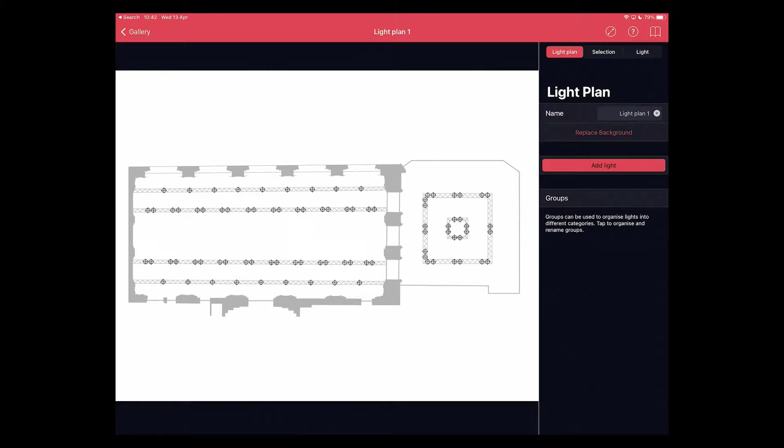Now I'm going to place that by zooming in with a pinch to zoom feature on the iPad, and then I'm going to tap on that number 1 fitting and I'm going to drag it over the location of that fitting.

Perfect. Next I'm going to add another light. I click on Add Light, and now I just want to make sure that the code is the same. Currently it's LTYWRY8J, and if I were to look on the RCL handheld controller, we'll see it's the same.

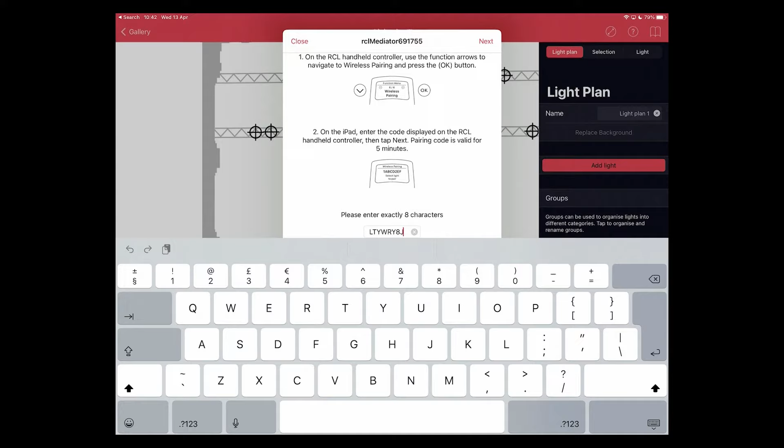So I can take this handheld remote in my hand, click Next on the iPad, walk over to the second light fitting, and then select it whilst it's flashing blue.

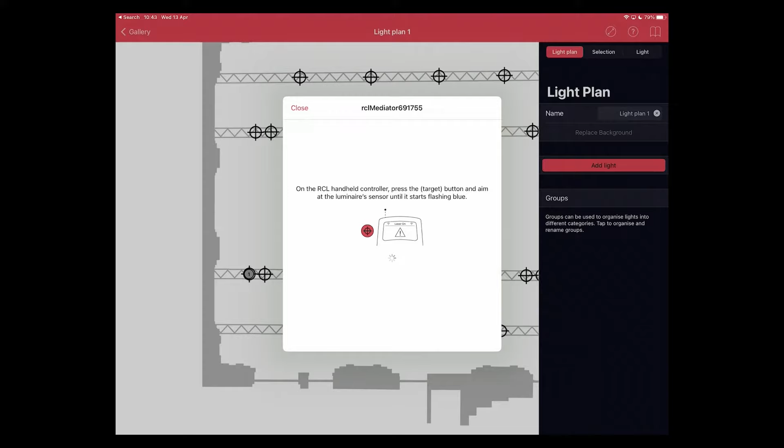Then head back to the iPad whilst it's communicating, and it speaks to the light wirelessly using its thread mesh, finds out what that light's capabilities are, and in the middle of the plan it will appear. And now I'm just going to drag it to a relatively arbitrary place on the plan.

Fantastic. Now I'm actually quite happy with those two positions. I only have 2 lights. In many instances you'll have many hundreds of lights. And in those instances it would be useful to be able to group lights together.

Let's say you had a ballroom that can be split up into 3 sections. Wouldn't it be nice if you could group all of the lights in ballroom 1 together, all of the lights in ballroom 2 together, and all of the lights in ballroom 3 together? So how do we group lights together? I've only added 2, but let's group those 2 together.

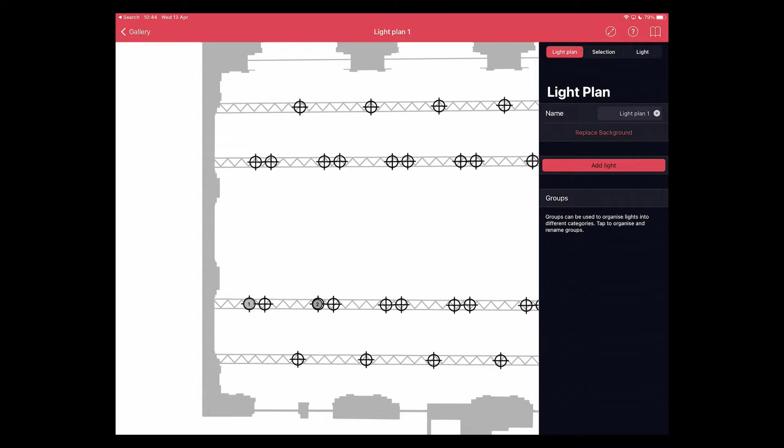You'll see in the top right of the RCL Control iPad app, I have 3 buttons. Currently we're on Light plan. We also have Selection, and we have Light. Under the Light tab, you'll notice we have groups, and currently we have no groups.

I'm going to tap into the middle of the plan on the left-hand side to make sure that no lights are selected. If I then tap on number 1, you'll see that in the top right, the DRX2 is selected, and I can give that a group. I'm going to give that red group.

I'm now going to tap into the middle of the plan again to deselect that light, and I'm going to tap on the second fitting, a DRX1 in this case. I'm going to group it as group 1.

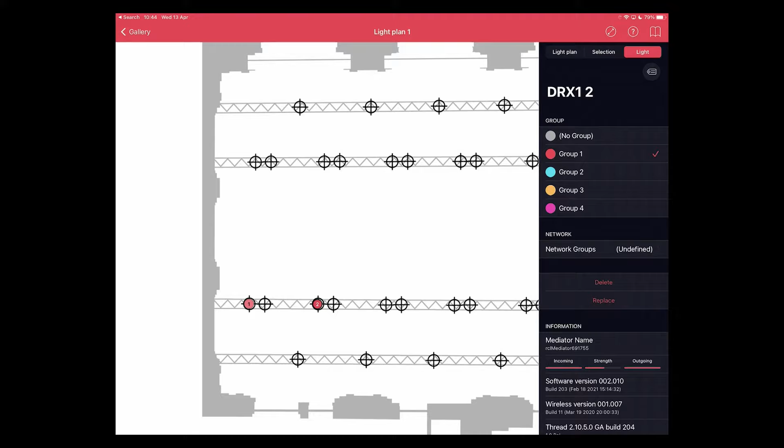Now, in this case, I've done that individually. I've tapped on one light and given it the red group, then tapped on another light and given it the red group too. But I can tap on all of the lights together.

If I wanted to, I could press Select All. In the Selection tab, it will select both lights. I could then go to the Light tab in the top right and change their group to the blue group if I so wanted to do so.

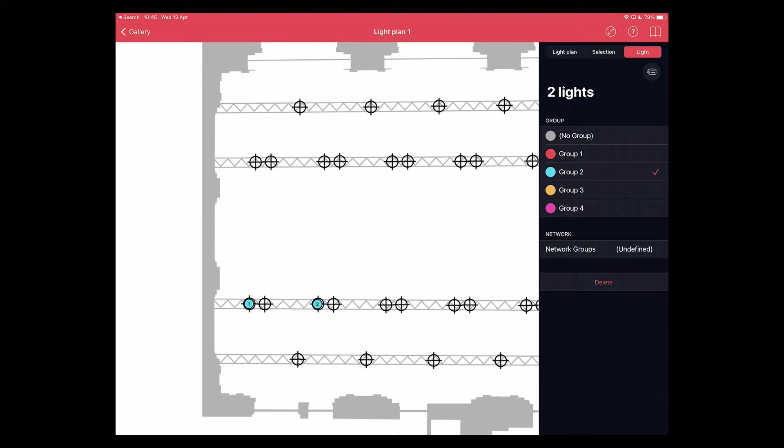Let's say now I've added all of the lights I want into my system and grouped them how I want. How do we now interact with the RCL Control app to move the spotlights? Well, currently we're still in edit mode. To exit edit mode, I'm going to press Gallery in the top left, then click Done, and click Save. That is going to save all of the settings into the iPad and into the mediator box.

Now this is the first screen that you would see on opening the iPad. I'm going to tap into that light plan. And here is my plan with the two blue group lights right there.

First off, I'm going to tap on number 1, and you'll hopefully remember this is a DRX2 fitting. On the right hand side of my iPad app is a control panel. I have a dimmer, which is a little grey bar below the 0%, and I just slide my finger along that to change its intensity. And you can see on the screen that indeed the intensity is going up and down.

I also have the ability with this fitting to change its beam angle. I have a little disc with a circular beam in the middle, and if I drag my finger from the center to the outside, you'll see the beam angle change. And in reality, the beam angle is changing too. This particular fitting is equipped with a lens vector panel, which is an electronically adjustable optic, and we can change its beam angle from 14 degrees all the way out to 55.

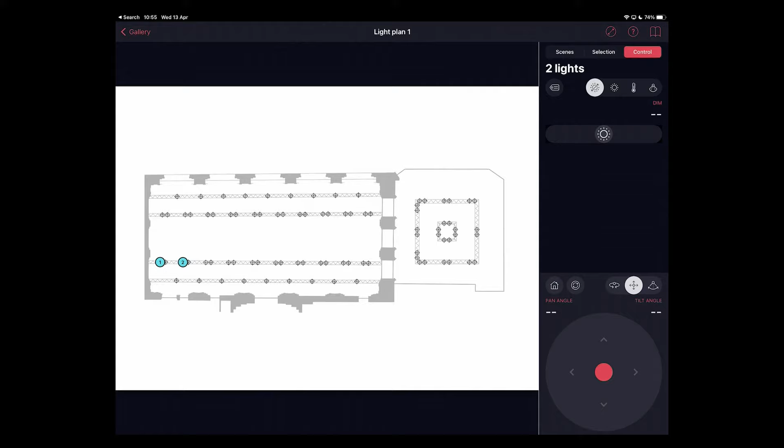With all the group 2 lights selected, I would click on the Control tab in the top right and use my dimmer again to dim both of these lights, and you can see that indeed they are both dimming up and down together. With them both selected, I'm going to go back into a control mode.

In the bottom right, I'm going to aim them all to the same position. Now, the DRX2, the black fitting at the beginning, has homed itself in pan and tilt. The DRX1 purposefully wasn't homed yet, it was just plugged in and given power. So I know if I want to send it to a specific position, it's going to want to home itself first.

Now I can either do that by sending it to a specific tilt or pan angle, or I can send a recalibration signal. How do I do that?

In the bottom right of the panel, where you see the joystick, just above where you see angle, there's a button that's the home button, and to the right of the home button you can see what we call a recalibration button. If I press this button, it's going to send a full recalibration or full homing sequence command to both of those fittings, and they're going to rotate fully in pan and tilt, find their zero positions, and then go back to where they were.

Now, if I press the home button, I know both of these lights are going to go to this perpendicular and straight down position. So if you ever get a problem where one fitting isn't doing quite what it should do, just send it a recalibration, and that way it will go to its home position or to its correct scene position.

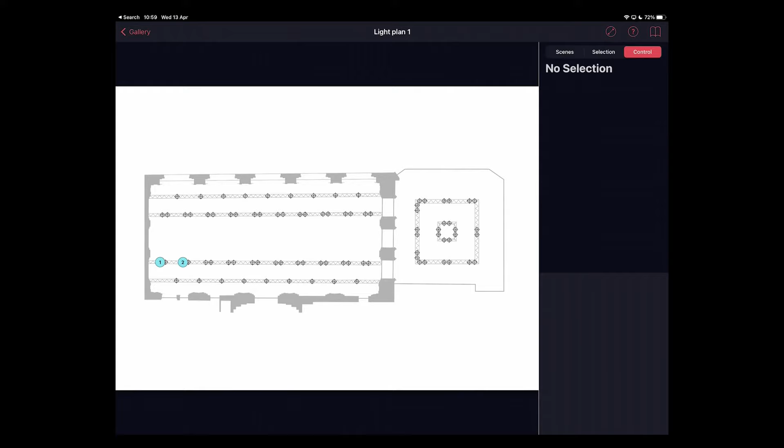And if I want to recall that scene, I would press home. I'm now going to move the lights a little bit. I'm going to select them all, go to Control, and send them both to some arbitrary pan and tilt angles, maybe a little more tilt, just so it's obvious. Once I'm happy with their positions, I'm going to save a new scene by clicking into Scenes, clicking Edit, clicking Capture. It communicates with those lights, finds out their new positions, and builds a new scene called Scene 2.

I'm actually fairly happy with the name, but I'm just going to call this one Test 1. I don't need to give this a DALI address, so I'm just going to click back on the scenes button and click done. It's now saved those two scenes.

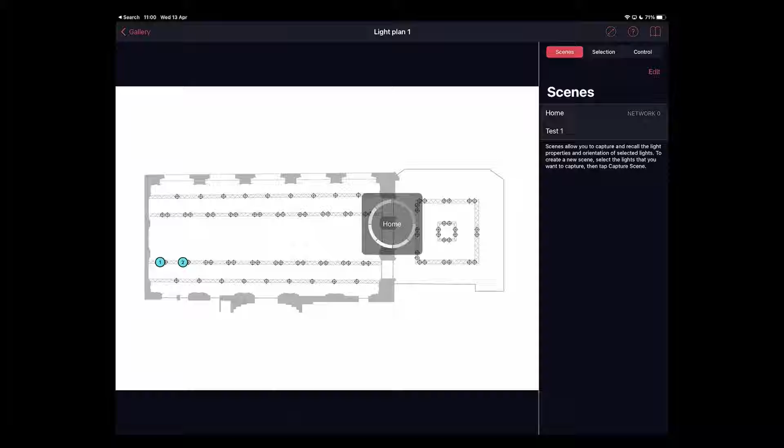So now I can switch between the home button by pressing home and sending these lights to their home positions, or test 1 by pressing test 1 and sending them to their test 1 scene positions.

So very quickly there, we've added scenes. We've actually given one a DALI address as well, and we can switch between the two scenes very quickly just by pressing on scenes and then the specific scene number we want. Is there a quicker way to control a specific area? Absolutely.

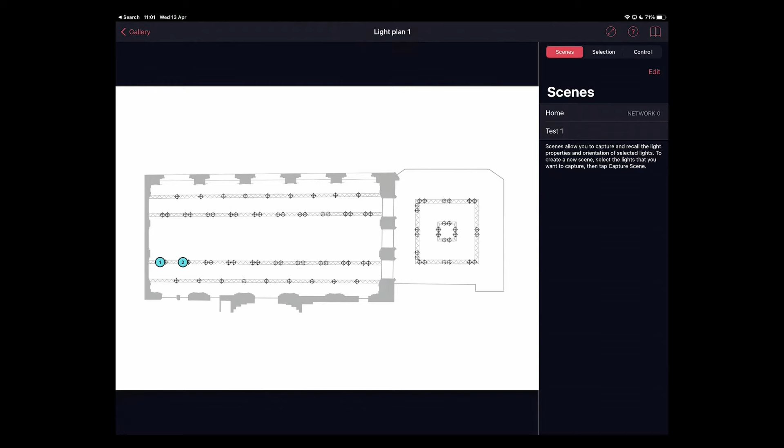I would just move my finger on the slider to dim the lights, and you'll see the lights on the screen dimming up and down together just by moving that slider.

Equally, if I wanted to send them all to a specific scene, I could just press on that scene here where it says H for home. Tap on the home button and those fittings will go to that scene. So that gives you a very quick way of sending an entire space to a specific scene or changing its dimming levels. What else should we know how to do?

Well, I think it's very important that now we've set all this time aside for adding lights to the mediator, setting scenes, and building groups, we should export this configuration and save it. How do we do that?

But before I click done, I'm going to enter the light plan again within the edit mode. I'm going to tap on fitting number 1, and this gives me an edit mode for that fitting, including a few other settings.

So below all of the group colors, I also have network groups. This enables me, just like we added a DALI scene number to a specific scene, to add a DALI group number to a specific color of lights.

I have group 2 selected. I click on network groups, currently undefined, and why not group 2? I'm going to give it DALI 2. So I tap on the number 2, press back, and now you can see that group 2 is allocated DALI 2. So I can dim by broadcasting a dim to global DALI 2, and I'll dim all of the lights in that group. Then right at the bottom, below that, you'll see some information.

This gives you the mediator name. It also tells you how strong the signal is. Going into fitting 1, it's incredibly strong because in this case the mediator box is only a few meters away. The strength of the signal is very high, and the outgoing strength is also very high. The fact that it's showing an incoming and an outgoing signal means that particular fitting is acting as a repeater for that signal too.

When you set up an installation of RCL Control for the first time, I'd always recommend adding spotlights first, closest to the mediator box, because those spotlights can then add to the mesh and extend the range of the signal. If you were to start adding fittings right at the far end of the room, you might not actually get a signal that far at the beginning. Whereas if you start near the mediator and work your way out, the signal travels much, much further.

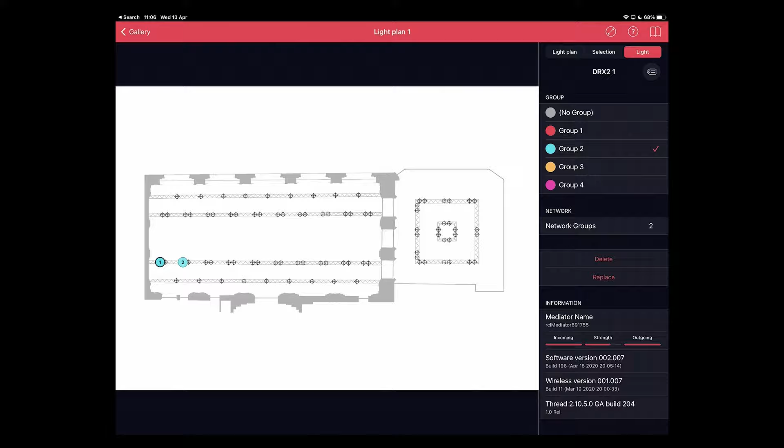If we go back to the iPad here, I can click on the top left, which is the gallery. I can then click done, click save. It communicates with everything else in the system and then saves this into the iPad. And then just as before, I can zoom into that space, pinch to zoom, click on a fitting, and start moving it.